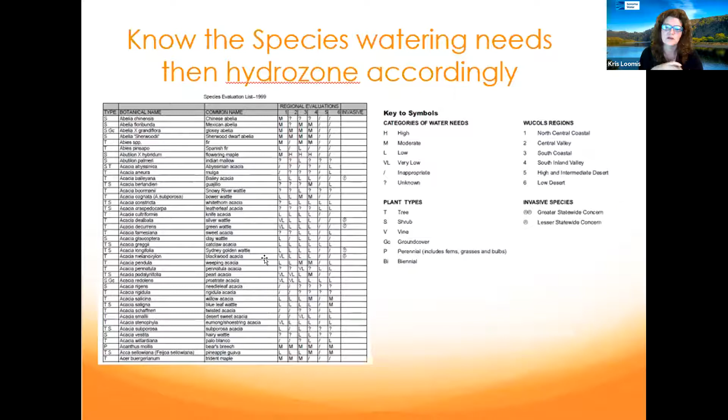And so here's another illustration I took from a friend of mine, Leslie Hart from the Master Gardeners, on hydrozoning. This is an example of separating your irrigation into zones. Even though all of this stuff across the top is in the same geographic area, it doesn't have the same watering needs. You can see there's a blue line that goes throughout the garden, and also a magenta line that goes through the garden, but they don't water the same area. They water different plants. They don't care about geography, they only care about watering needs.

So it gives you the option that if these are trees, you might want to water those once a week, where some other plants might need to be watered twice a week. So you want to make sure they're not on the same valve. Over here you see a little veggie garden, and vegetables a lot of times need to be irrigated every day, so you certainly want them on a different valve than all the rest.

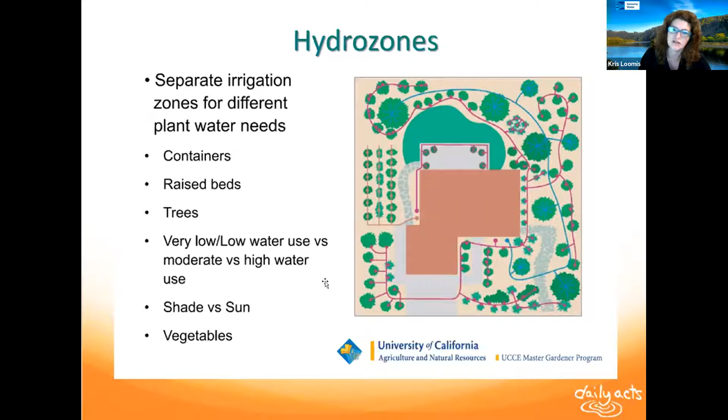The other thing is exposure. Keep in mind if it's in the sun or in the shade, if it's a tree versus a shrub, they should definitely be on different valves.

As far as making maps for your irrigation controllers, this is one illustration of what a hydrozone map looks like to include within the irrigation controller. You can see across the bottom here, we have all these trees that I've shaded pink. These are the same kind of trees as these over here, but the system can only handle so much water, so they have to split this valve into two. This gives you a good illustration that these 6 trees are on one valve, and these 4 trees are on another.

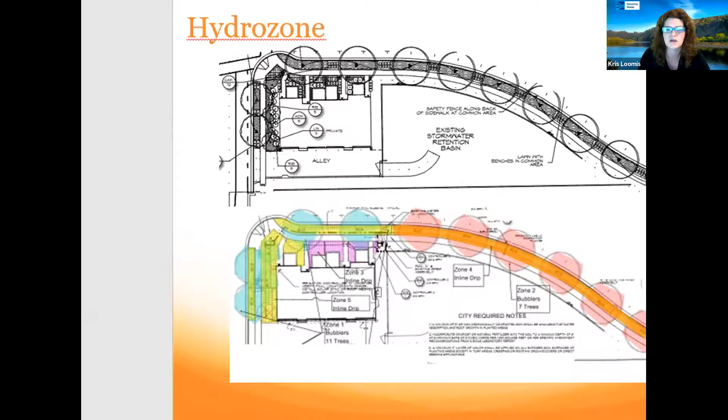And then also we have this kind of purple and yellow hydrozone. Even though they're geographically right next to each other, they may have completely different watering needs, and that's why they're on different hydrozones. Okay, so now we're going to move on to irrigation. I just wanted to go over a couple things to keep in mind. If you're brand new at this and people say, well, how much can I put on one drip zone, how far can I go?

One of the numbers I've tried to stick with that's easy to remember is 200. That means try not to exceed 200 feet and try not to exceed 200 gallons per hour. If you have to go farther than 200 feet, you might not be able to do all 200 gallons. If you're going a long way but not irrigating much along that way, you might be able to go farther than 200 feet. If you're using more than 200 gallons per hour, that might be fine, but you might not be able to go more than 200 feet.

When you're standing out looking at your landscape and how much irrigation is on a line, ask yourself: have I exceeded either of those numbers? If you have, that could be one issue you're having.

Pressure regulators - one thing I've run into is people get them confused with something that's going to create pressure for you, and that's not true. This particular pressure regulator is rated at 20 PSI. So if you only have 15, you're not going to get 20 - you're only going to have the 15 that you have.

Irrigation systems are variable by the amount of pressure coming into them. There are some that are compensating, but you still have to keep in mind that the more oomph you push into the system, the more water typically is going to come out. So if you want to stay within the manufacturer's guidelines, you want to use a regulator that keeps it to the amount of pressure it should be running at.

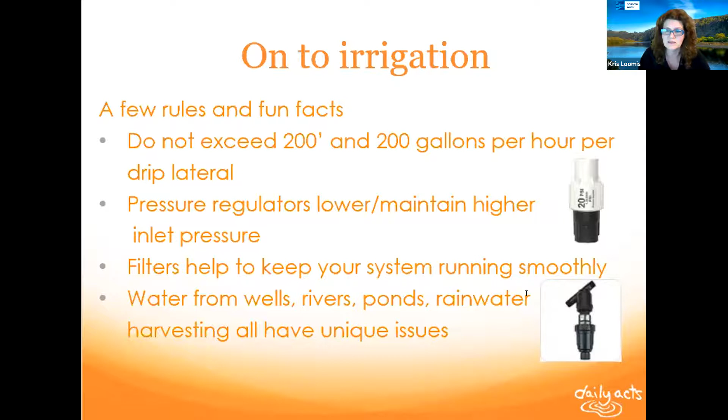Drip systems need a minimum amount of water pressure, and the more sophisticated irrigation components get, the more particular they are about pressure. There are some components that won't even open and let water out until you've hit the pressure they need - that usually ranges somewhere between 7 and 20 PSI. So you want to make sure you have enough oomph.

That takes us to the subject of gravity-fed systems. Keep in mind that if you put in rainwater harvesting or rain barrels, you're not going to be operating any sprinklers. This is gravity-fed, very little oomph involved. For every 2.31 feet of height in water, you only get one PSI.

Just to put that in perspective, your house probably has somewhere between 40 and 60 PSI, so you're not going to go very far. You have to keep in mind that it's very temperamental.

Quality irrigation materials are not much more expensive than poor ones, so keep that in mind. And just because you put in a drip system and they're low maintenance doesn't mean it's no maintenance - you've got to check on your system. A lot of times it's running while you're asleep, and it should be, to keep evaporation down. But every once in a while, you've got to turn it on and take a look.

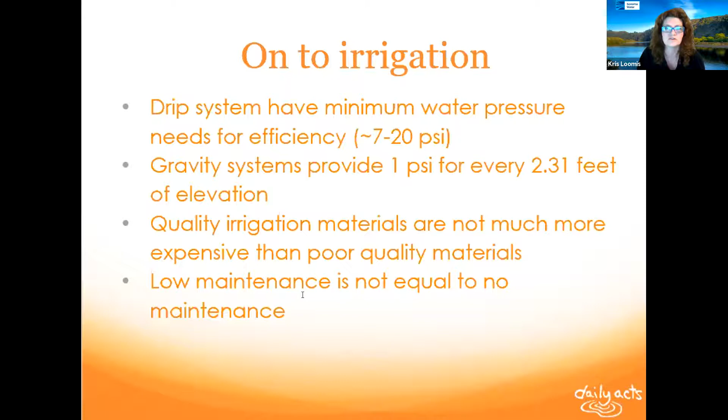So here are the fun items for drip irrigation. Some of these may look familiar, some might not. These are all just different puzzle pieces, right? This is like Tinker Toys for adults. We have bubblers, stream bubblers, goof plugs, micro sprinklers, flag emitters, pressure compensating emitters, emitters built into the tubing, larger size filters, and regulators.

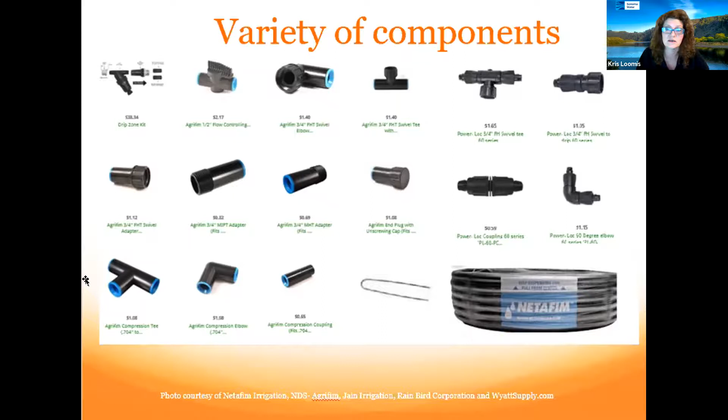All of these are components of your drip system. This image also shows all the little doodads you can use to go around corners, because if you bend this too tight, it'll crimp, but it'll make a nice circle. But if you want to split off into more than one direction, there's T's, couplings in case you need to fix a repair - you can cut it and put a coupling in. These are all just little doodads.

So like I was mentioning, some irrigation components are temperamental for pressure. Here's an example of what they call pressure compensating and non-pressure compensating. This type of emitter on top is non-pressure compensating, which means the more oomph you give it, the more water it's going to put out.

So you can see down here for this 2 gallon per hour emitter, if you give it 10 pounds, you're going to have almost 2 gallons. But if you give it 40 PSI, you have closer to 4. So it doubles the flow rate, which is crazy, right?

So then you get to this one here, and you can see that once you hit the minimum pressure, which is about 7, it's flat all the way across. That means if you have a really long run, you're going to get the same amount of water coming out of the emitter at the beginning versus the end.

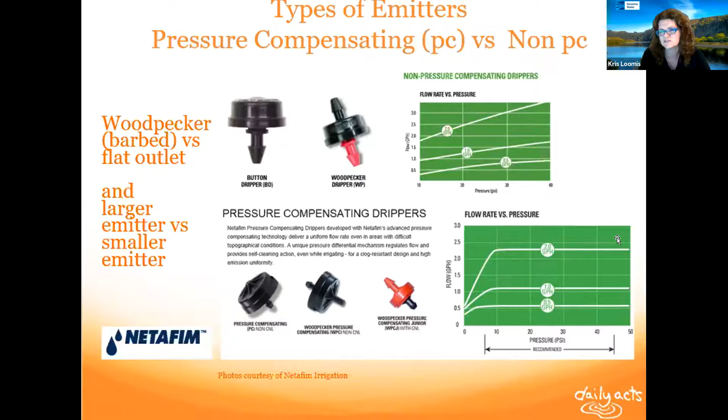So this next one is just a visual of an experiment I did, where I took this half-gallon flag emitter and ran it for 30 seconds and then compared it when it was regulated at 19 PSI versus non-regulated, which was about 60 PSI. The flow actually ended up being about double.

So you might ask, why would you ever want an emitter that isn't pressure compensating? It really does depend on your particular situation. If you have really short runs and you're not going very far, there's not going to be a lot of pressure fluctuation anyway, so you could get away with something that's not pressure compensating.

This particular emitter, if you ask me which is my favorite, it depends on your water quality, your situation, how much pressure you have. If you have cruddy water, this is one of my favorites because you can open up the top, clean it out, and then put it back together. You'll probably get squirted in the eye a couple of times, but that's part of the process. So keep that in mind.

One of the questions that came in was about irrigating vegetable beds, so I'm going to bring that up right now because it's appropriate for this particular product.

So this is an inline emitter tubing. It comes in 3 different flavors - this particular manufacturer makes it in 2. It's a 1/4-inch tubing, so it's pretty small, and it has emitters built into it every 6 inches or 12 inches. They also make a 9-inch one.

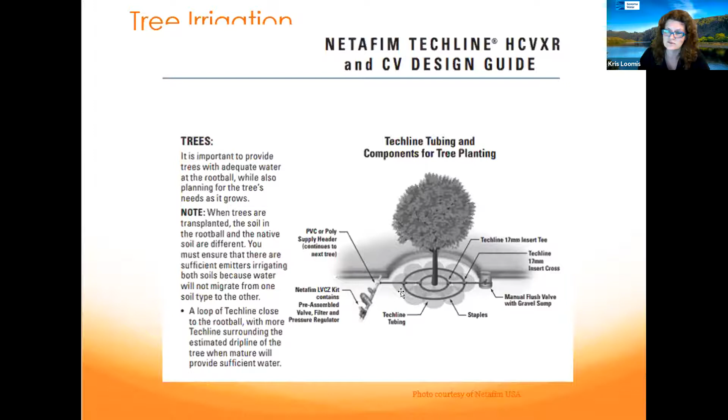There was also a question about how much water to give a tree. We don't have a lot of time to go over this, but it's in the links—this is link number 2, tree irrigation. This long link will take you to a website that talks about how much water to give a tree.

There are other calculations as far as canopy—how big is the canopy—and it also depends on the type of tree. Fruit trees really fluctuate during the year as to how much water they need, so you're not going to give the same amount of water all the time. It depends on whether it's under production, leafing out, fruiting, or has dropped its leaves. These are things to consider. If you go to this website, you can read up more about that.

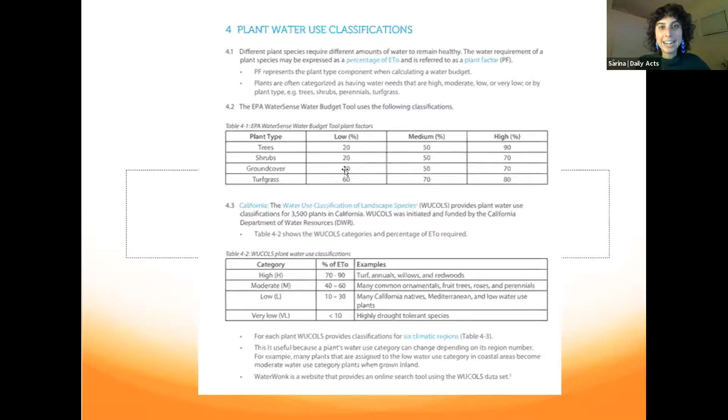Before we move further, we had a couple of questions about inline emitters for quarter-inch spaghetti tubing—people wanted to know if it's pressure compensating. So I'll go back to that page and show you. They are not pressure compensating, not the quarter-inch. The larger stuff is.

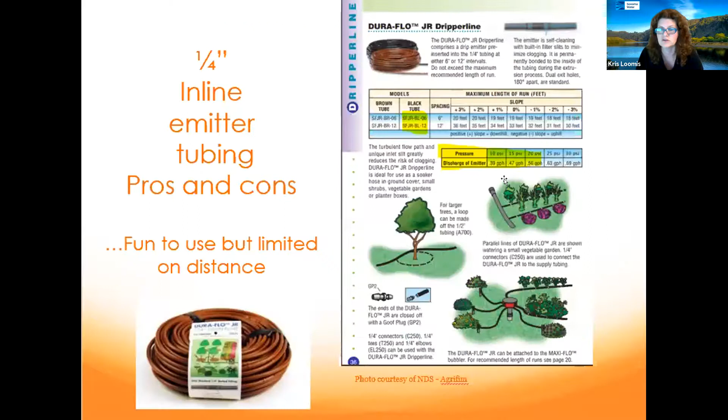Let me try to zoom this in a little bit. Okay, how's that look, can you see my cursor okay? So this is the 6-inch spacing, and down here is the pressure—this is the output you get depending on how much pressure you have.

If you only have 10 PSI, each emitter puts out about 4/10 of a gallon an hour, but at 30 PSI it's almost 7/10. That's one reason they have that length restriction—the further you go, the more the pressure poops out by the time it reaches the end, and then you get a variance that's too big and not within an acceptable range. So if you started with 30 PSI at one end and ended with 10 PSI at the other, the plants at the beginning get quite a bit more water than the ones at the end.

So keep in mind it's not pressure compensating, but as long as you're not losing a lot of pressure, it depends on how much pressure you have, versus the Techline inline emitter tubing, which is closer to half inch, that is pressure compensating. It has a pretty flat curve no matter how much pressure you have—from about 14 pounds to about 50 pounds, it puts out the same amount of water. Think that covered that?

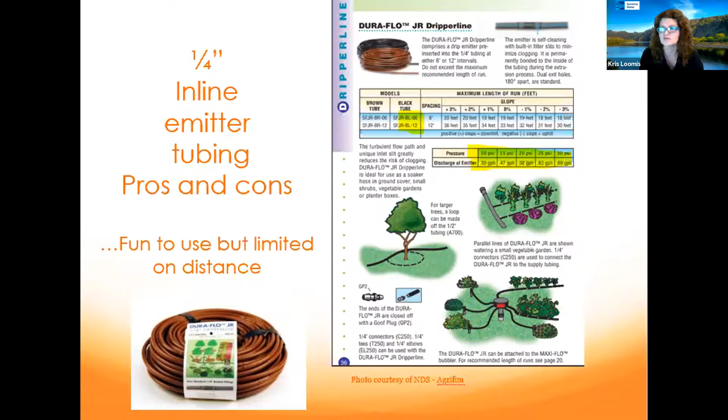So one way to help keep it from clogging: number one, do not bury it in the soil. Number two, try to just very loosely cover it with mulch if you're going to cover it, because the mulch is going to break down too. So if you're rotating crops and things like that, you might have to scrub it off the surface and make sure it's not in the soil.

This quarter-inch tubing does have a hole on both sides of the tube, so that's going to help. It's not the most efficient emitter, but the holes are on both sides of the tube. I know you're not going to be able to see this very well, but I'm going to hold it up anyway. Right here is an emitter, and it has a hole on each side. If I plug one of those holes, the water comes out more vigorously out the other side. So that's one way it compensates — if it did clog one hole, at least it has another one to help compensate for that.

But I've had some of these clog up with minerals, and honestly, I just come along and bend it, and it kind of knocks it loose and will sometimes dislodge whatever was in there, or maybe it was minerals on the other side.

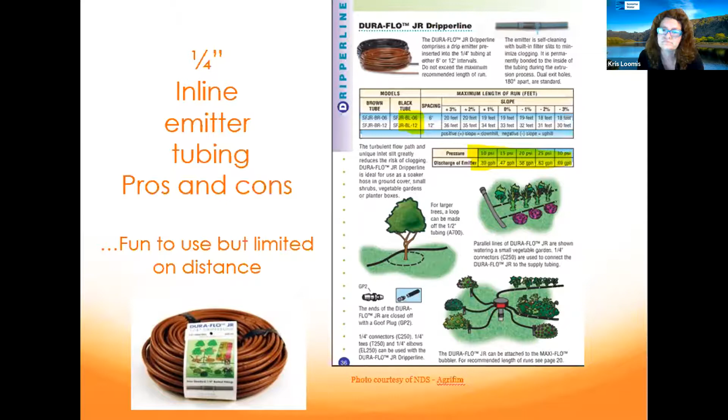Yeah, there's that. Anything else? Okay, all right, let's keep cruising then.

How much water do your plants need? That was one question that somebody had. Now it gets a little deep here for a second, guys, so just hang tight with me. This is something you probably want to read about more later.

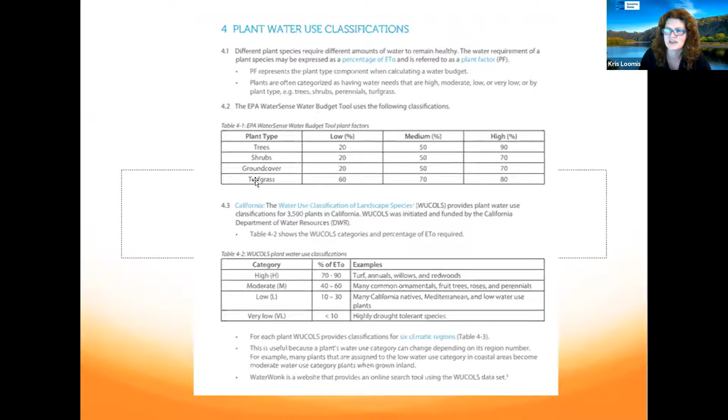I took this image from qwel.net, from their professional training materials. There's a manual for the Sonoma Marin Saving Water Partnership — that's going to be link number 4. It talks about water use classifications: low water use plants, medium water use plants, and high water use plants. Then they describe how much water you need in inches instead of gallons. So I'm going to try to knock that out for you and help you out a little bit.

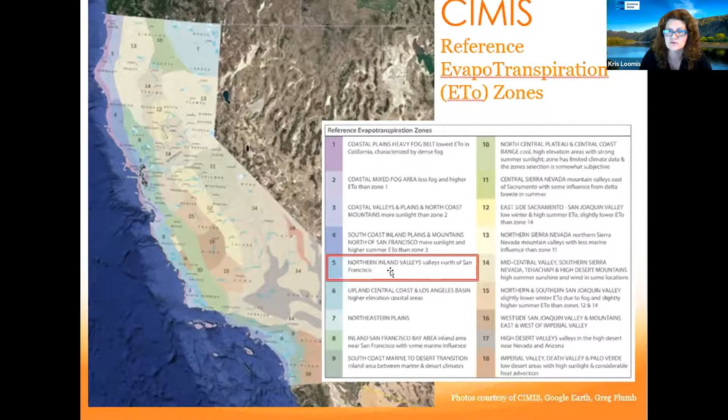Here's something called CIMIS, and this is for California — you have to find where you live in here. For Cotati, we are in Zone 5, which is described as Northern Inland Valleys, valley north of San Francisco.

This next chart — try not to cross your eyes too hard, I'll take it easy on you. Basically, here's Area 5 that we live in. What you want to do is open up this map and try to find where you are. Then the numbers kind of cross over a little bit, so look for the little T. There's a little T right here — that's number 5, where we are.

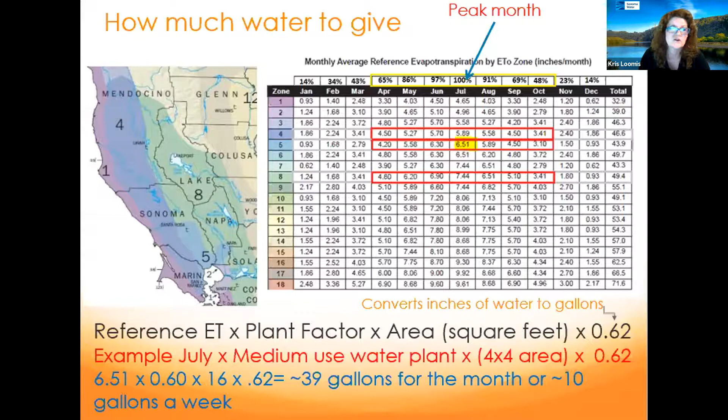Somebody also asked, how frequently do I irrigate? Well, that depends on a few things. We looked at the last slide with how many gallons you need to apply. Now this talks a little bit about soil.

So you don't want to apply it too fast with clay soil—it goes in and then moves laterally sideways. That's a mistake a lot of people make with their turf sprinklers: they turn them on and run them for 20 minutes, and water ends up going down the sidewalk and gutter, where they should have only watered for maybe 5 minutes, done several times a day instead of one 20-minute spurt.

So the long and short of it is that coarse soils need an adequate amount of water applied at a faster rate, but irrigated more frequently. You don't want to give it too much water at once, like the whole bucket, and then walk away for a week, because that just won't work. Coarse soils need more frequent irrigation since they can only hold a little water per foot. Fine clay soils need an adequate amount too, but a slower application, and less frequently, since they can hold a lot of water for a longer period.

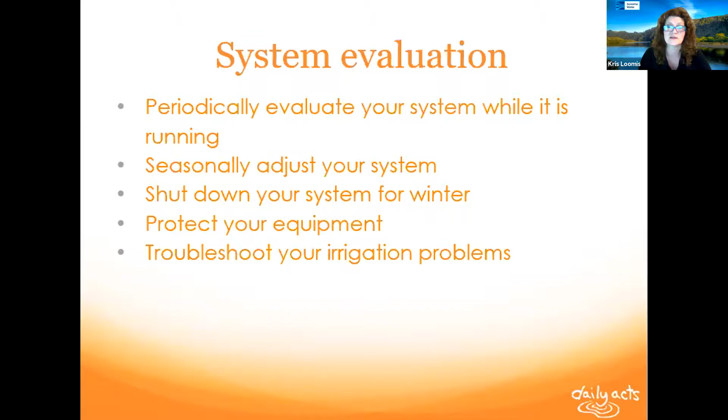What you want to do when you're evaluating your system is stop, look, and listen. See if you see any geysers, hear any geysers, see any puddles, dry spots, signs of erosion, or poor performance.

So one day I was at this shopping center and I get out of my car and I see this erosion, and I'm like, oh, what's going on? I look down and I see that this irrigation part was broken in half. So me being the person that I am, I reached into my car and went, well, what supplies do I have? What irrigation parts do I have? Well, the mother of daughters, I had hair ties in my car. So that's what I used to do that irrigation repair for a City of Santa Rosa customer.

One thing about puddles that I've discovered is a lot of times the puddle is not where the problem is, so you might have to go backwards and figure out where the water's coming from. But dry spots are a problem too, because what happens with dry spots is people think they need to water for longer. So if an emitter is clogged, instead of replacing it, they just try to water it longer to fix it. So you've got to check out those dry spots and see why it's dry. What's going on? Is the tubing kinked? Is there an emitter that's plugged? What's going on?

Do you see that some of your irrigation drippers seem to be just cruising along, dripping, dripping, dripping, and others are just kind of pooped out? There's things that you can do to fix that.

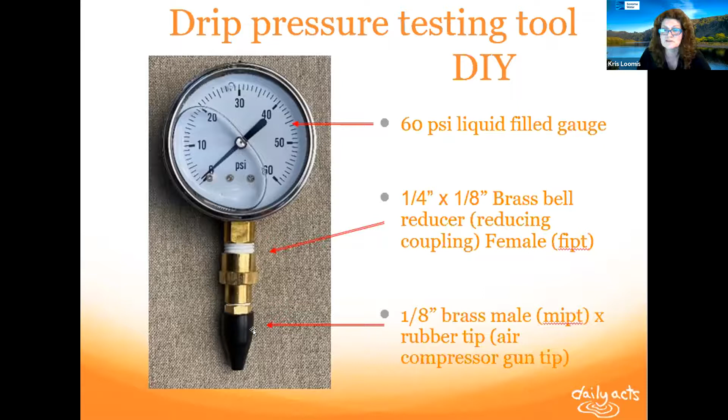Basically, it's a gauge that has a brass fitting on it that's 1/4 inch on this side and 1/8 inch on this side. Both sides are female. And this rubber tip right here is the tip from an air compressor gun, so it's rubbery and makes a great seal, and the hole in the end of it happens to fit very nicely over your irrigation components.

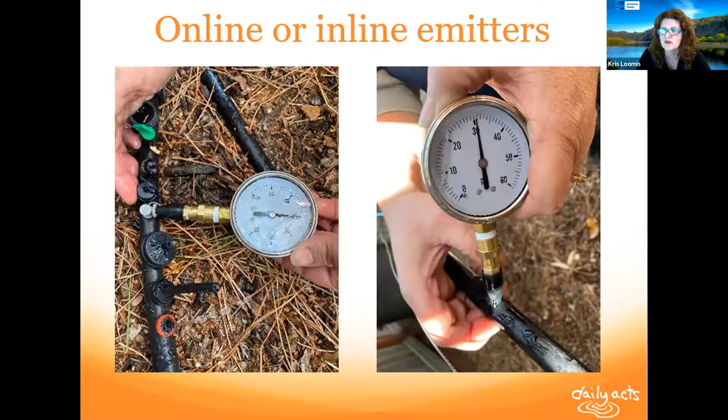In this image, I'm showing it attached to this type of emitter. It fits on all of these type of emitters. And over here, it looks like I'm just sticking it on a blank tube, but if you look at the pressure rating, you'll see this is attached to an inline emitter tube over the hole of it, and you just push it on there and there it goes.

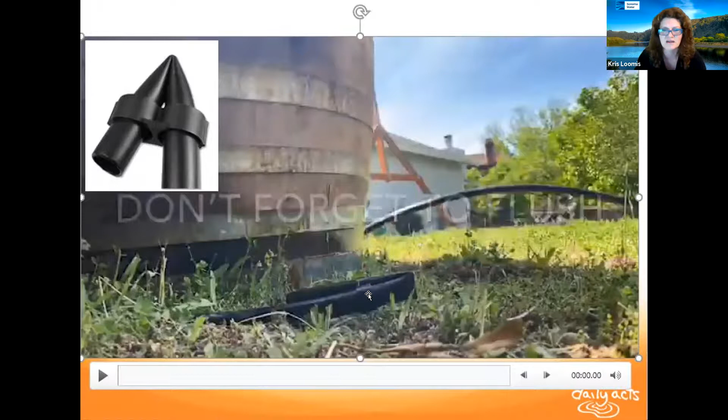Now, one problem you might run into is if you don't know where the end is. Like if you've inherited a system and you're like, okay, great, where's the end? And you're looking and looking, trying to find it. Well, don't give it too much thought. You can always just add an end. So what you want to do is try to find some place where you can add in a T and then just put in a short piece of pipe and put in your own flush valve.

And then do something like put a rock on top of it, put a gnome on top of it, something on top of it that you'll remember where it is later on, so you'll be able to go out and flush it out.

So before you put your system away for the winter, you don't want to put it away with a dirty filter, because then it's just going to be that much harder to clean it up. So when you start up in the spring, you're going to want to take a look at it.

Depending on your water quality, that will kind of dictate how frequently you have to come back and look at these. If you have any kind of water that has a lot of organics in it, you want to come back frequently and clean these out. And if these are always clogging up, you need a bigger one that has more filter surface area so you don't have to be cleaning it as often.

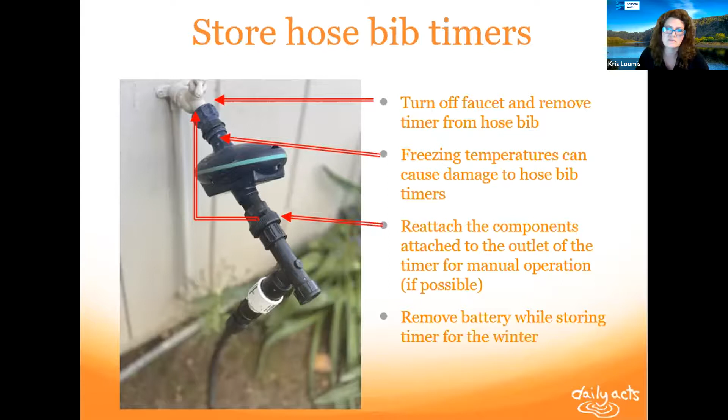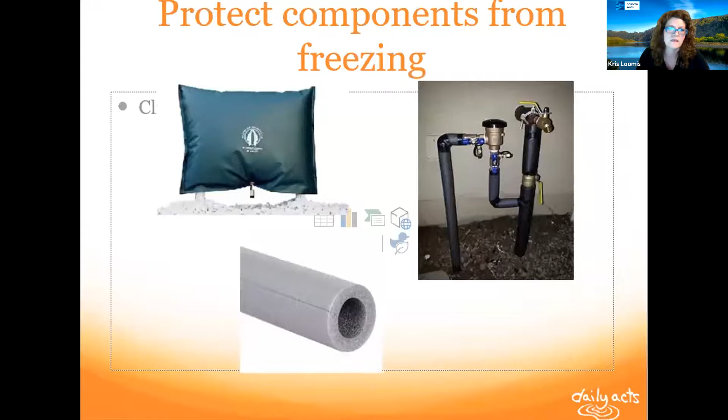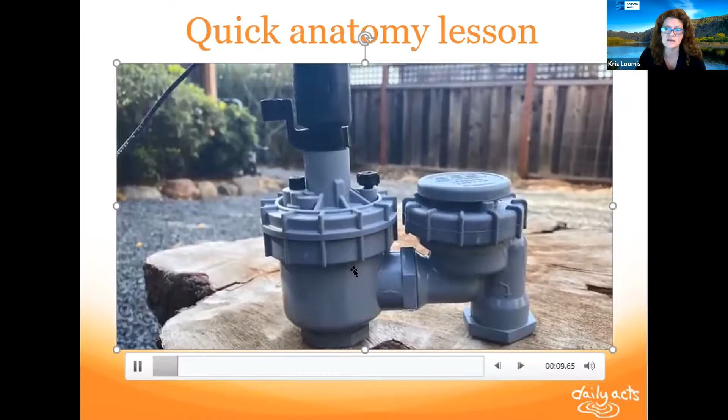Okay, so real quick, I'm going to give you just an anatomy lesson on a valve. This is an anti-siphon valve, which is a popular type of valve on the West Coast. Water comes in here on this side. This side has water in it all the time, and when it turns on, it opens up and lets water go out the other side.

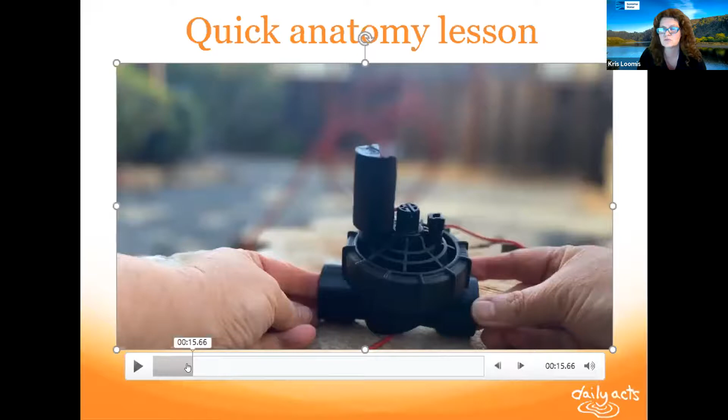This is called a globe valve, which is also a popular item, but is put in the ground. It also has the same type of principle as far as it lets water go in, but it doesn't have the backflow prevention like an anti-siphon valve does.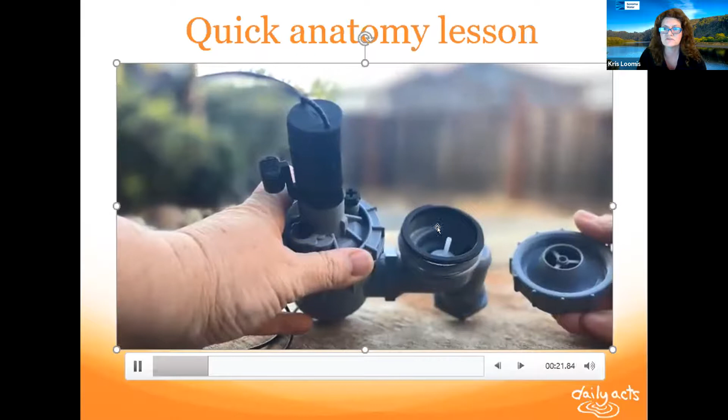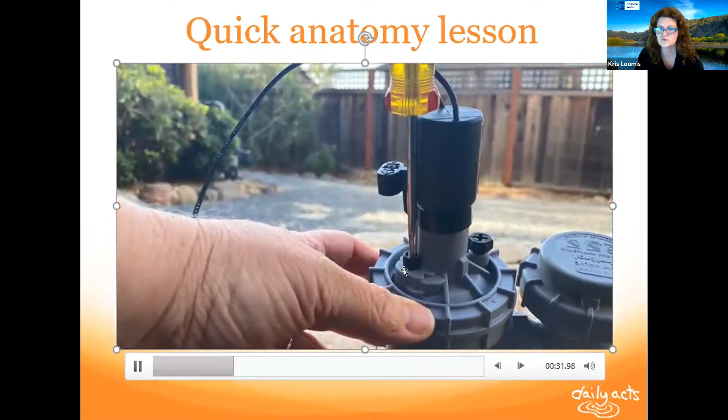So this is opening the anti-siphon side of the valve, and in it is a little float device which caps this off during operation and doesn't let water drain out of it. When the system shuts off, it prevents water from flowing back. This is the flow control of the valve. This is the electrical solenoid of the valve.

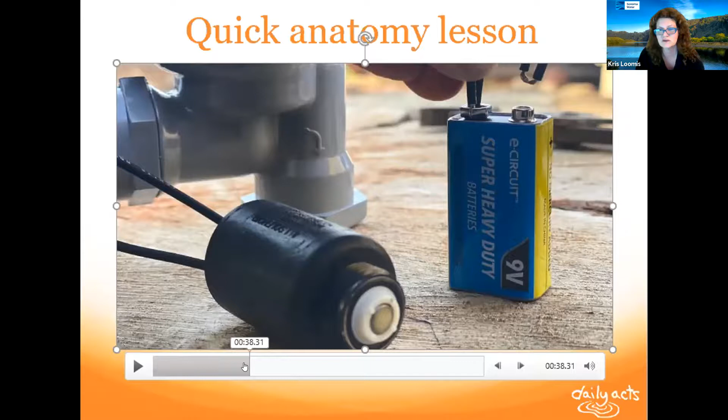This is how it operates when the controller sends a signal to the valve: it opens up and will turn on. So this is a demonstration right here. If you look at this spot, you'll see where the plunger is with no power to it. And then this is an illustration of what happens when the controller sends power to the solenoid - it sucks it up inside.

I'll show you why that's important here in just a second. So this solenoid goes into this compartment, this little hole right here. When this thing lifts up, it allows water released off the top of the diaphragm to start flowing into the system. So that's how that works.

Okay, so these particular valves are called jar top valves because they open like a jar. You spin the parts off of them. They're usually really tight and you might need a pair of channel lock pliers to open them up, but they're super easy to work on.

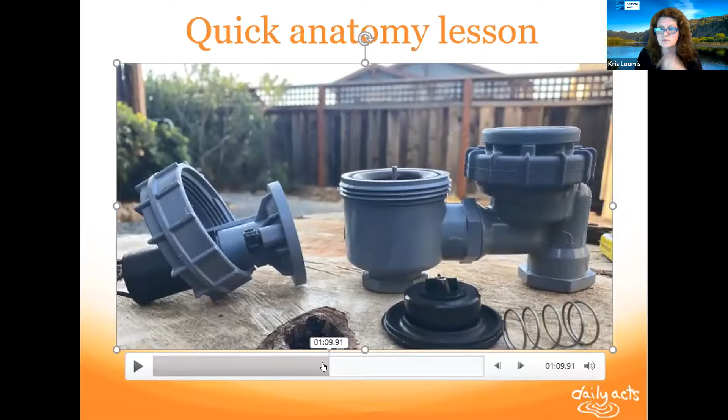There's not a lot going on. In this side of the valve, the only thing in there is a diaphragm and a spring, very little things in there. So if you take that out and there's any kind of black gunk on your hands, it's time to replace it. And if you're inspecting the valve to see what's going on, you're going to want to check here and see if there's anything going on. Then it's real easy to just put it right back together again, hand tight.

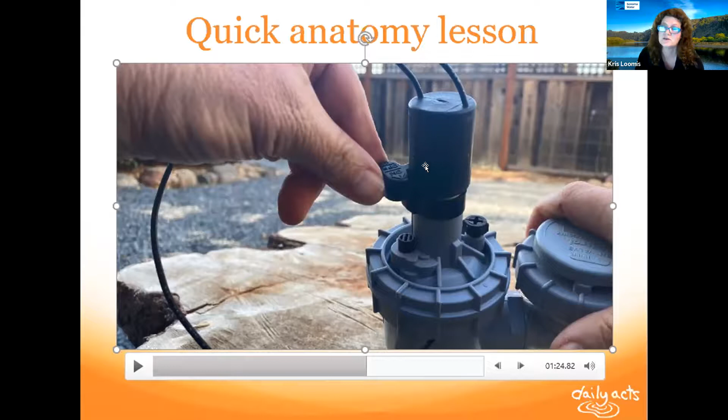Now this one right here was a common problem back when I used to work in irrigation supply, that when people would install these, they would put them in the on position. Well, the on position means manually on, and it's going to stay on forever until you push it back to off. Because like I showed you how it works electronically, it needs to be in the off position for that plunger to come up and for it to operate.

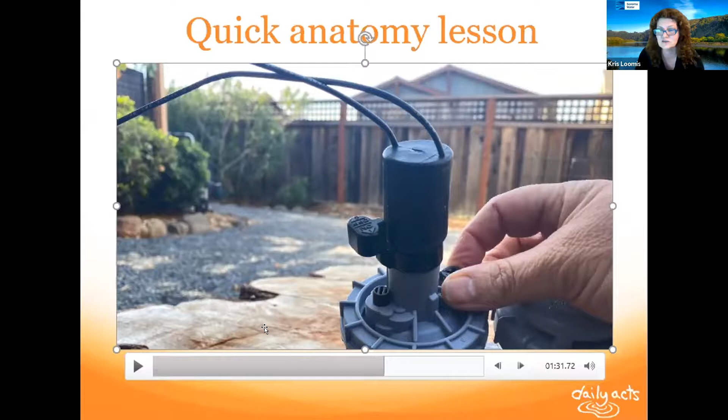Okay, this is where the manual bleed screw is. This also releases pressure off the top of the diaphragm and lets water go out. So if you have any crud stuck in the valve, this is one way to try to dislodge it. It's also another way to turn it on, but this screw will fall all the way out if you go too far. The other thing is the valve will stay on forever until you put it back in all the way. And then there's the flow control.

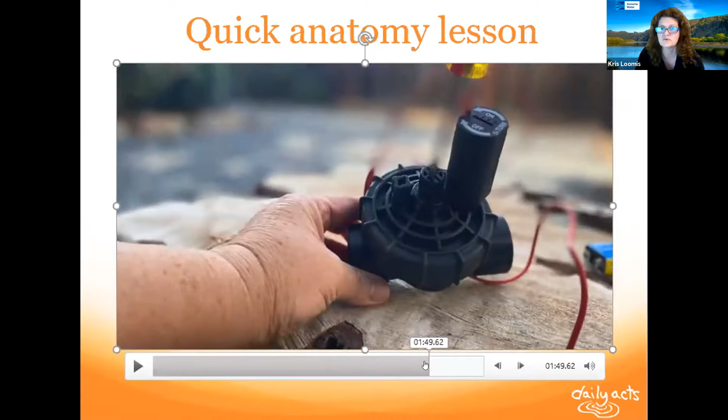Okay, so this valve is very similar. It also has a flow control on the top. It has a diaphragm and a spring in the middle. It's a little bit more particular about how it goes back in because it has a different shape to it, which is common for a lot of valves. It also has a similar solenoid, only it's what they call captive. It doesn't have the ability to fall out of there.

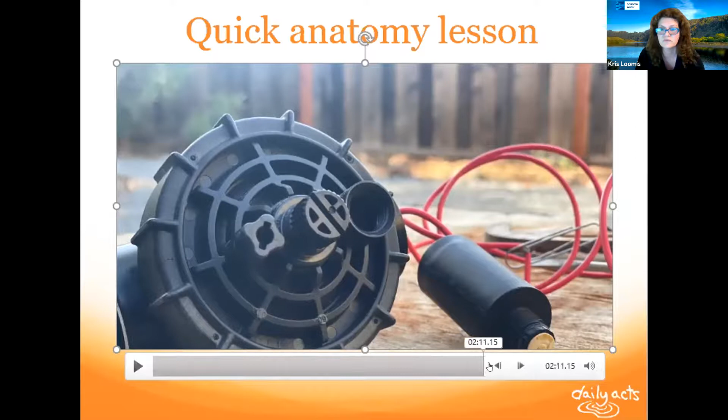Okay. Any questions before we move on?

Okay, great. So replacing a valve solenoid, same kind of valve. I'm going to show you real quick how to do that. This is one of the questions that was sent in ahead of time. So this is an anti-siphon valve.

First of all, this is not to code. This valve should be 6 to 12 inches higher than the highest outlet that it serves. Otherwise, when the system shuts off, water might drool out of the top of this cap, because when water comes back, it tries to go back, and to prevent that from happening, this automatically will drain water out of the cap. So if you have a valve that does that, ask yourself, is it higher than the highest outlet it serves? If it isn't, then that's what's going on.

In this particular situation, this is all downhill from here. It's still not to code, but it's all downhill, so it doesn't have that problem. Its problem is periodically the plunger gets hung up in it, so it's time to replace the solenoid. This is an older model. It doesn't have that manual on and off.

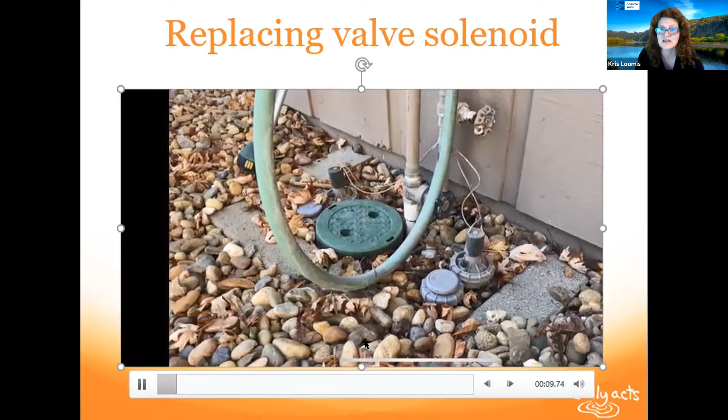And this is a closer look at what we're working with here. And this is the brand new solenoid that we're going to be putting on that valve. And then the type of wire connectors I'm going to use, some people think these are old school, but I am a little old school, so I'm just going to be honest here. These are some of my favorites. These are called dry splice connectors.

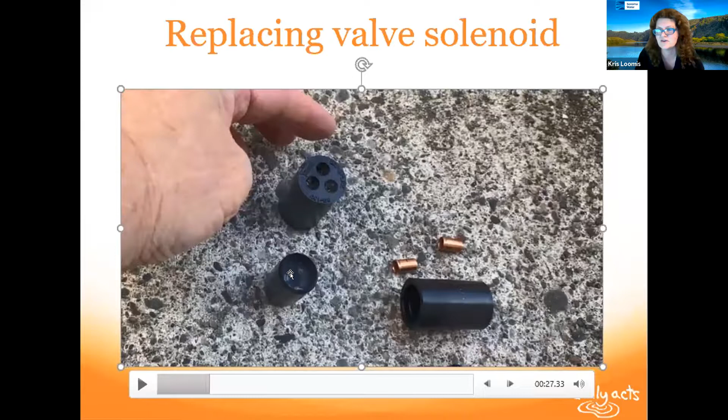You'll see that they have some goo inside of here, okay? That's to keep dirt, water, and everything else out. So we're gonna connect the wires this way.

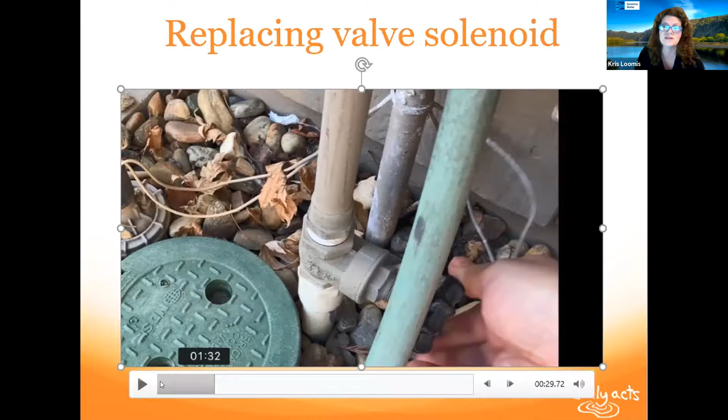First thing I'm gonna do is shut the water off to this valve to make sure it doesn't turn on. As soon as I pull that solenoid off, it's gonna take the plunger off of that little hole and it will stay on forever. You'll probably get nailed right in the eye for sure if you take that off, so just to warn you.

So I'm gonna turn the water all the way off. And then before I get cocky, I'm going to release all the pressure off of that valve to make sure I shut off the right valve. There's actually two valves sitting over here. So I open up this bleed screw and see, does it open up with full pressure or does it just kind of gurgle? So I picked the right valve, I was able to shut it all the way off. I did that by turning the screw.

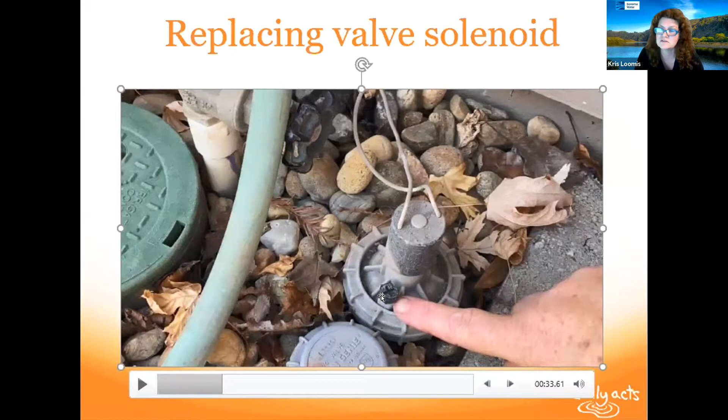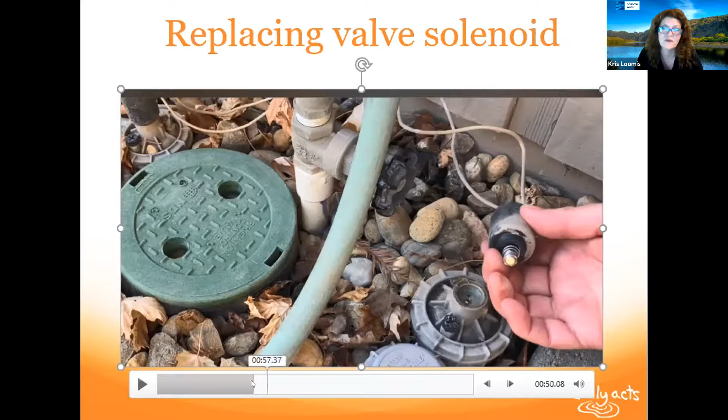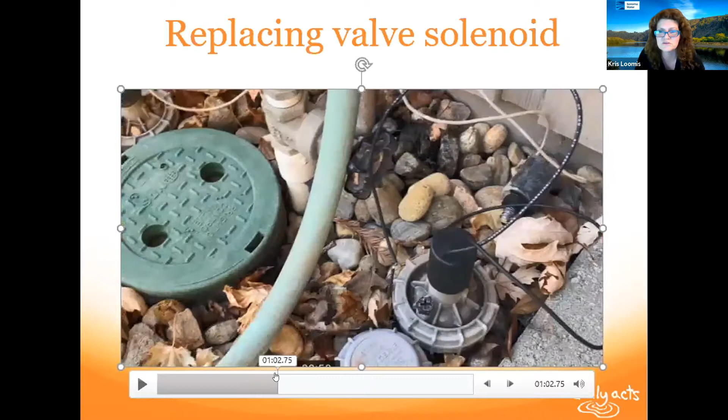So I got that solenoid off, and now I'm just going to put this new one on that has that little retainer in it. So if it looks different, don't be scared, it's just got to fit right. This one fits perfectly. I could turn the water on right now if I wanted to, but I'm going to wait until I'm all done just in case.

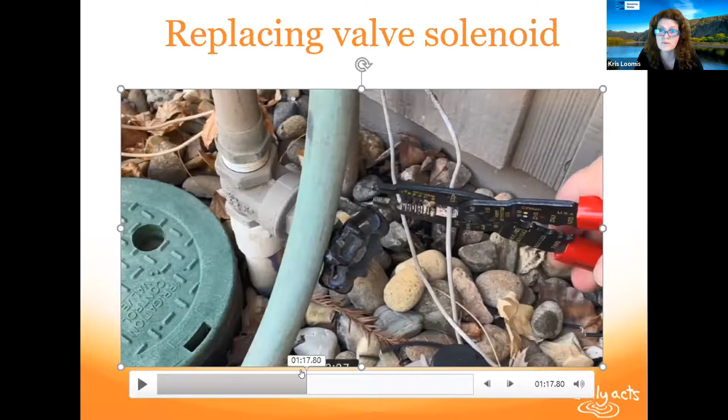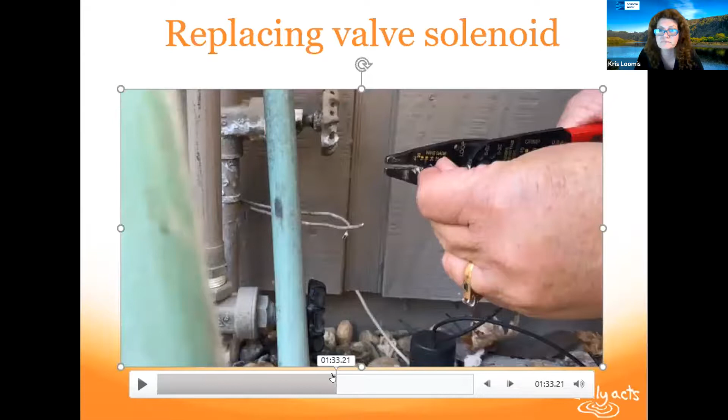So now I've got to cut these wires. There's no power on, I didn't turn the valves on while I was doing this, so there is no electricity going through here. And this is very low power also, plus I'd have to cut both wires at the same time. So anyway, cutting the wires, and then I'm going to strip them back and pull out about 3/8 of an inch wire in both of them.

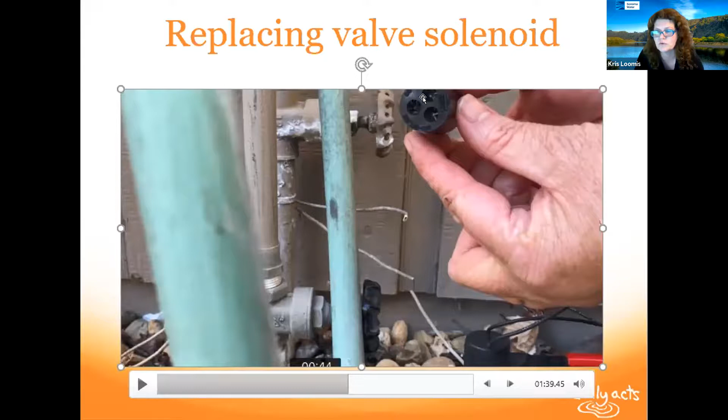And then take a look at this little guy, it has these 3 holes. You need to put one wire from the solenoid in through one hole and one of the control wires in through a different hole. You can't put them in the same hole, kind of defeats the purpose. Okay, so that's what I'm going to do, I'm going to pull the wires through.

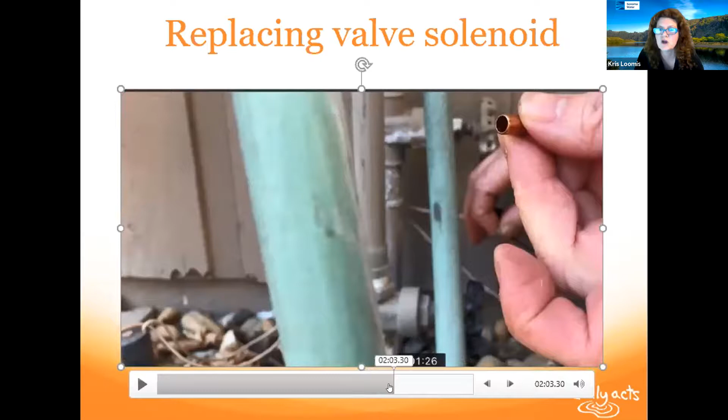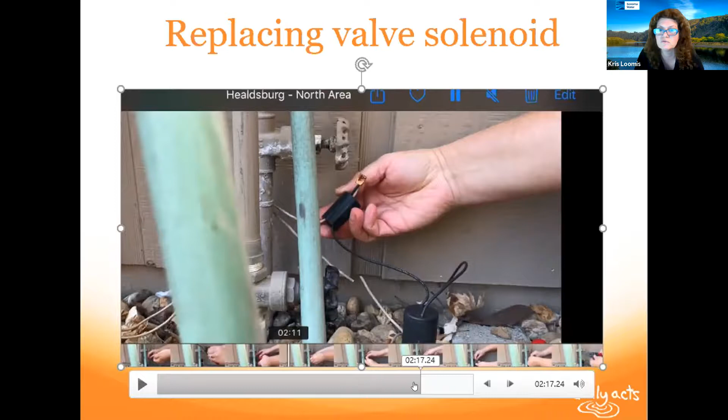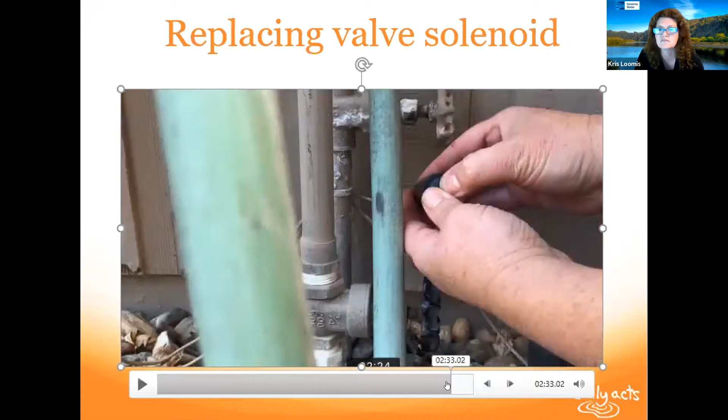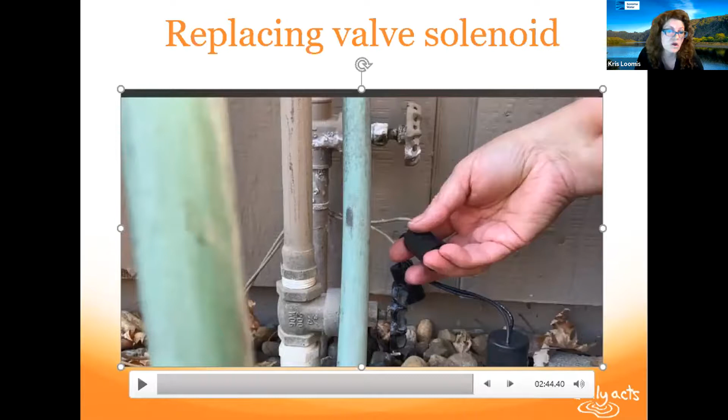And then you have this copper crimp. So I've twisted the wires together, and then I put this copper crimp over the top and I squeeze it down so it's making contact with both wires. See there it looks, there's the finished part of it. So I have the 2 wires, one from the controller, one from the valve going in there. And then I'm going to take that little gooey guy and stick the wires into that and then put it inside of that drum, and that one is all done. And then I just repeat the process with the second one, and that is all there is to that. So hopefully you can feel empowered to get that done.

Okay, so now we're going to talk about controllers here. So irrigation troubleshooting. I'm going to tell you the number one thing that people would come in and complain to me about their controllers is they felt like it was running all the time. It would run, and then later on they'd come back out and it would be running again. So what's going on? So think about this.

So you want to go to your controller, turn it to start times, and see what you have in start time number 1 in your display. Then turn it to start time number 2 and start time number 3, and see if there's anything in there.

Keep in mind that whatever is in that program is going to run that many times. So check and make sure that you don't have more than one start time, and also make sure that your valves aren't in more than one program.

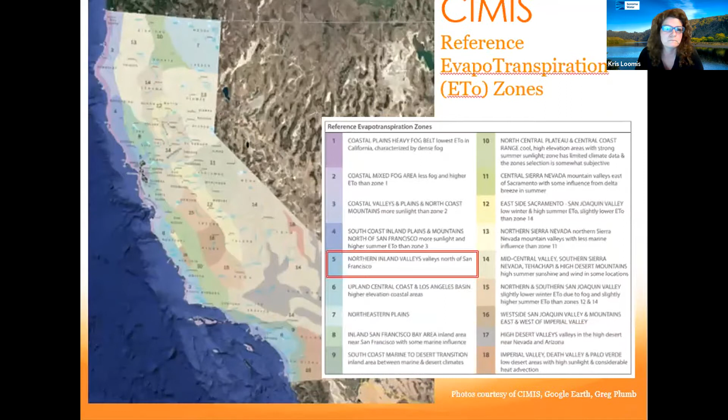So you want to make sure you have the current time in your controller, and then get to your seasonal adjustment. When you're first doing the controller, make sure it's on 100%. Then as the season goes along, say October, you figure out what percentage of irrigation you need compared to July. If it's about 45%, you'd plug that in.

What that's going to do is change all of your run times for you. So if 100% was 10 minutes on zone number 1, and you change it to 45%, it'll water for 5 minutes, because it's not going to do 4.5 — but it automatically does the math for you. So you don't have to remember every month to adjust minutes down or up. You plug it in for July, and then you seasonally adjust.

So the minimum you should do is go out once a month and do this, but we're going to get into that a little deeper in just a minute on how to keep track of it.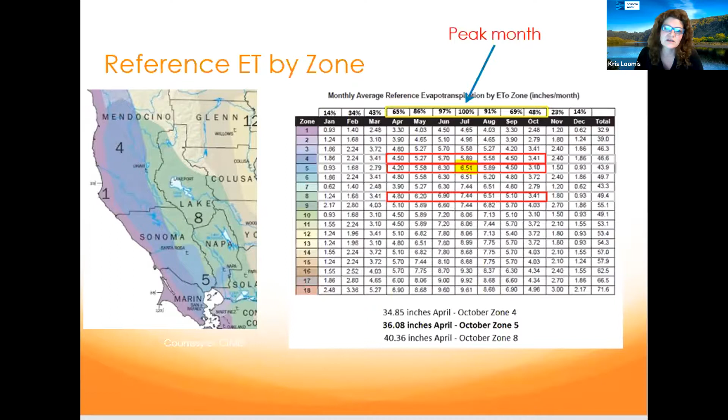And then I'm going to take it, let's see here — we're going to take it one step further here in just a minute.

Okay, so here are smart controllers. Smart controllers do that seasonal adjustment part for you, so that way you don't have to wonder what percentage October is of July. Smart controllers already know what percentage they are. And well, how do they know? Well, some of them are very localized — they take local weather conditions. Some of them are from satellite. Some of them are just right on your property, depending on which type of model you prefer to use.

And then here's another illustration of different seasons and what percentage of water needs are. So in August it's 90% of July, where October is about half of what you need in July. So here's a little chart that I made that also shows Petaluma on it, but that's because I'm using Petaluma's weather station, which is just very friendly neighbors to Cotati. So their watering needs are very close.

So you can see on here what I did on this chart is show you the percentages like I did on the other one, but I also put down a little something to keep track of. So I show the controller being off in January, February, March. And then once April comes around, rainfall amounts start dropping, and the amount of water needed in rainfall equivalent is a little over 4 inches.

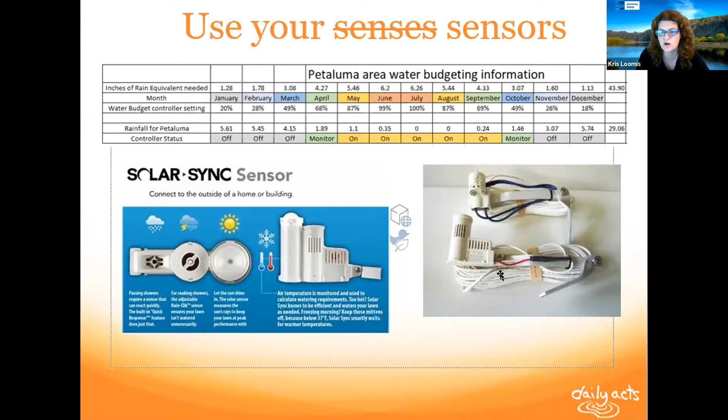But it also takes real time data into account, what's going on right now. So if it's unseasonably cool in July, it will make an adjustment for that period instead of just irrigating as much as it normally would. If a controller doesn't have some way to detect heat and rain, it's just a sensor that shuts off when it's raining or freezing, and that's it. Those aren't considered smart. They're better, but they're not smart.

Okay, let's do the how are you feeling? We're narrowing down on how much time we have, and we're just wrapping things up here. Okay, how are we feeling? Are you guys ready to rock and roll on either tackling some of your repairs or doing an irrigation system?

Does this make you want to hire some help? Does it make you want to take an irrigation course and learn some more? Or perhaps help with an installation so you can learn a little bit more on somebody else's property, and that way you don't have to worry about making the mistakes on yours, and you can learn as you go.